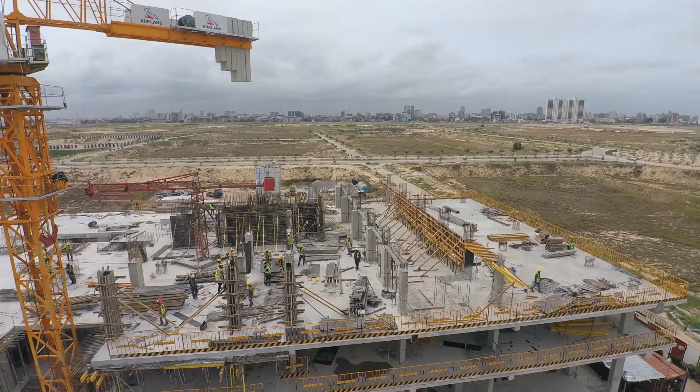Construction produces about a third of global carbon emissions. There's a need to use materials which are eco-friendly, with lower carbon footprint than traditional materials. Fiber reinforced polymer is such an eco-friendly material, requiring less energy to produce than steel and other materials.

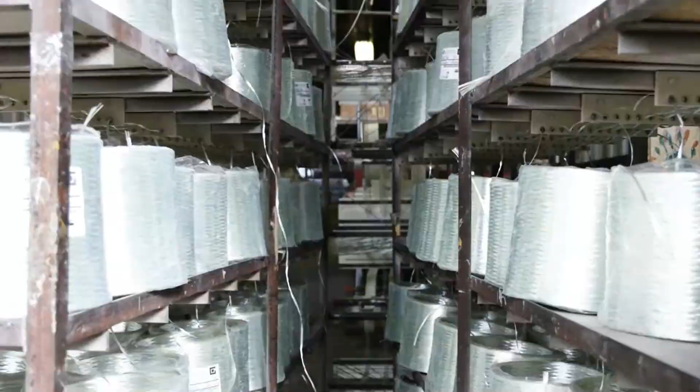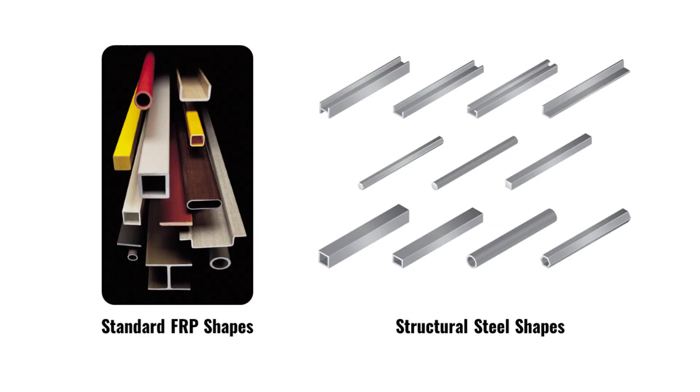What is FRP? FRP is a material where carbon or glass fibers are embedded in a resin matrix. The fibers provide strength in the longitudinal direction, and resin acts as a glue between these fibers. The resulting shapes resemble steel structures, and the benefit is that FRPs are 4 to 5 times lighter than steel components.

The main driver for using FRP materials is corrosion resistance and lightweight. In today's presentation, I will present bolted and hybrid beam to column joints using FRP profiles. This is part of a conference presentation which I presented in Cape Town, South Africa back in 2022, and I absolutely enjoyed my time and want to share my experience with you.

This is how my presentation is organized. Firstly, I will talk about background to the research. Secondly, I will explain the test setup. Thirdly, I will discuss the experimental results. Fourthly, failure modes, which are really very important in this research. And finally, I will sum up some takeaways from this research.

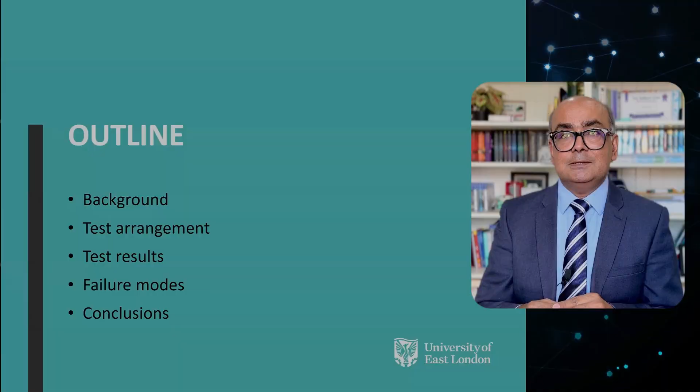FRP composites in civil engineering are mainly used in 3 applications: FRP profiles for new build structures, FRP reinforcing bars, and FRP in repair and rehabilitation of existing structures. The research on FRP rebars and FRP strengthening and rehabilitation is quite well developed. However, there isn't much research on FRP profiles.

The main reason for limited research in this area is lack of understanding about joints, and there are no agreed design codes for FRP profiles. That's why in today's presentation I will focus on cyclic behavior of beam to column joints, where there is very limited research on this topic.

Why is FRP such a desirable material? The main reason lies in its lightweight and corrosion resistance.

Here is a real life application. This is a case study, Dawlish Bridge in Devon, UK. On your left side, you can see the old rusty steel bridge that was reconstructed in 1937. Because the railway is very near to the coastal region, corrosion is a major issue in this bridge.

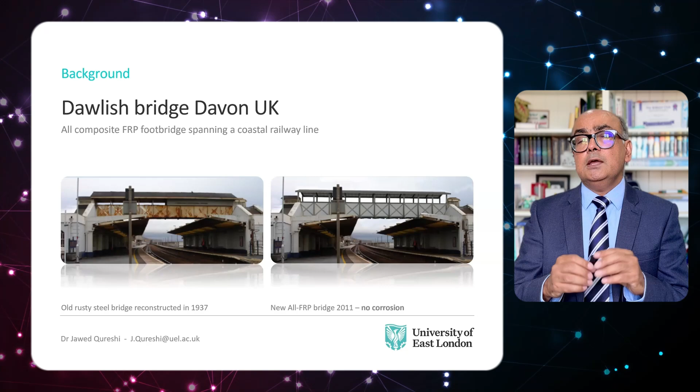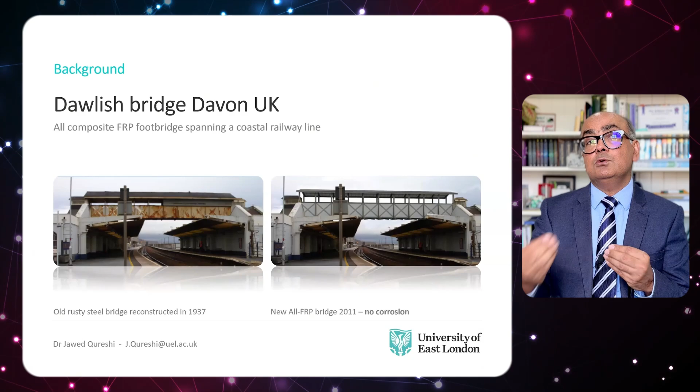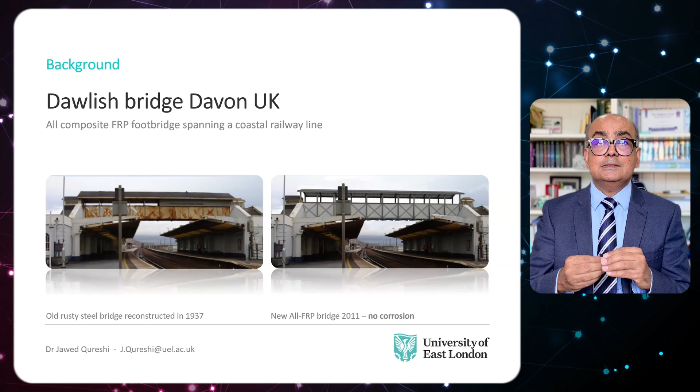On the right side, you can see the FRP bridge, which actually resembles the old rusty steel bridge, but is very light and corrosion resistant. Even this new FRP bridge sustained the 2014 storms in the UK, which were very devastating, and it is still standing as a marvel of FRP structures.

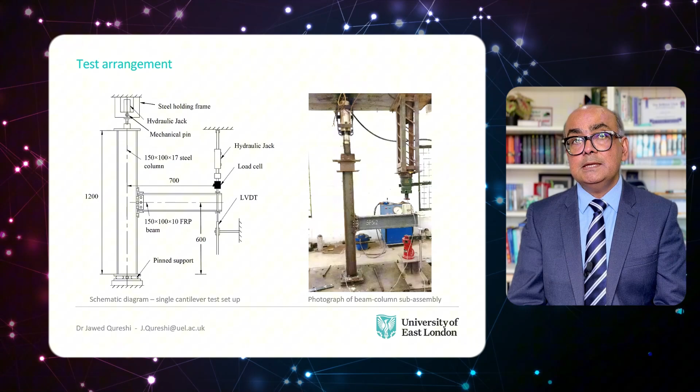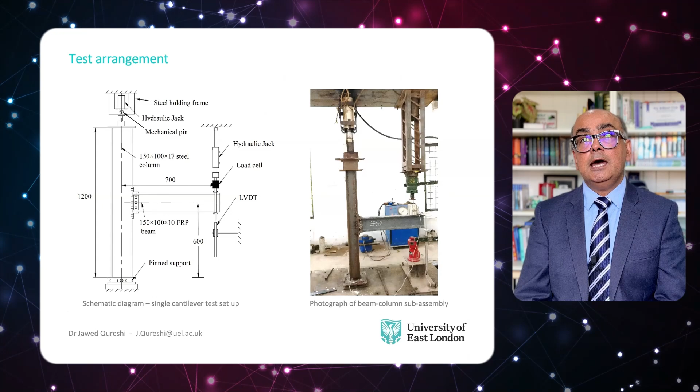The testing uses a single-sided cantilever beam to column arrangement. The column is of steel material and the beam is pultruded FRP. Both FRP lag angles and steel lag angles are used to connect members. Joints are both bolted and hybrid, which is a combination of bolting and adhesive bonding.

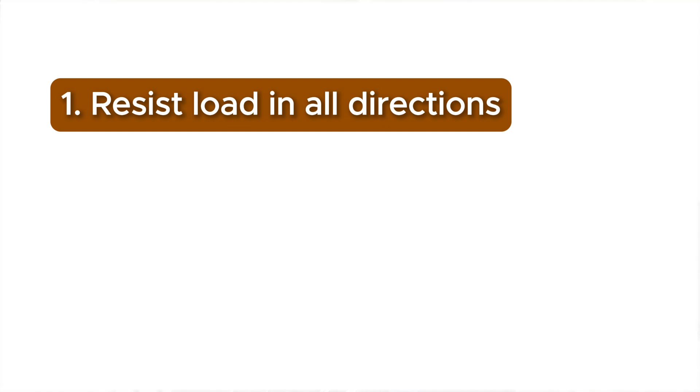You may argue why bolting and adhesive bonding is combined in a hybrid joint when the load is taken by a stiff load path, which is adhesive only. There are 3 main situations when hybrid joints are very useful. Hybrid joints can resist load in all directions. Bonding is good in shear, and bolting is really excellent in tension and transverse loading. So combining them, we can utilize the useful, desirable properties of both materials.

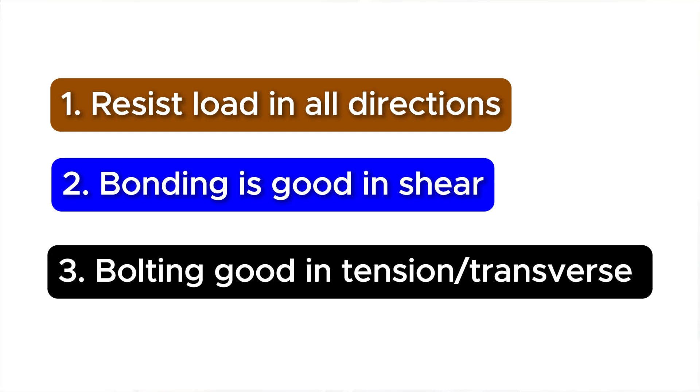Fire and long-term fatigue performance of hybrid joints is better than bolted or simply adhesively jointed joints. However, the extra cost of fabrication must be carefully weighed against the benefits of hybrid joints.

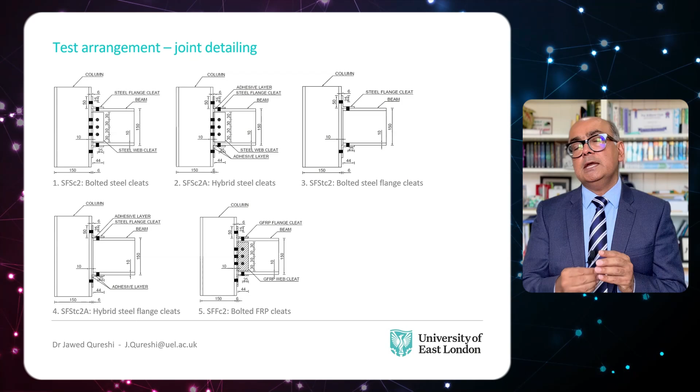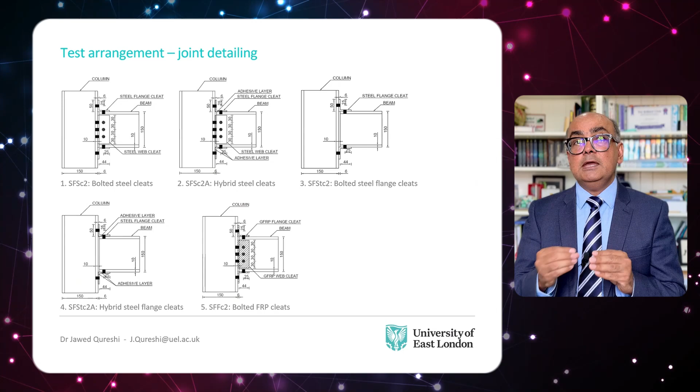This slide shows joint detailing. 5 tests are conducted. The first joint uses bolted steel flange and web cleats, and it has a hybrid version with both bonding and bolting combined. The third and fourth joints are similar to the first and second joint but without web cleats. Finally, the fifth joint uses FRP flange and web cleats.

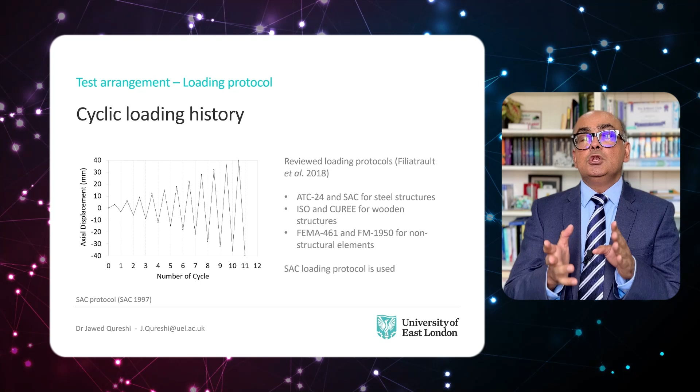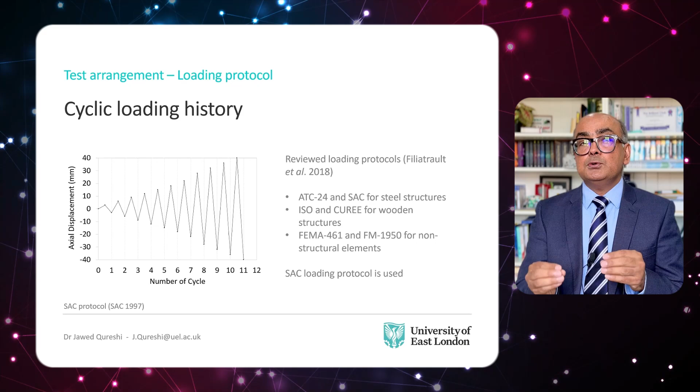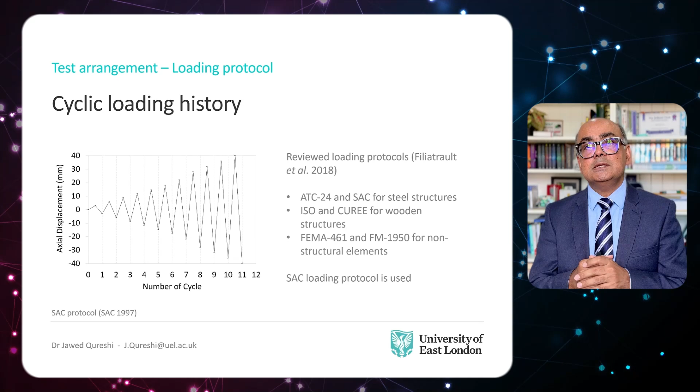Loading protocol - this is very interesting. In the absence of ductility, finding a suitable loading protocol was a bit of a challenge for us. We reviewed loading protocols for steel, timber, and non-structural elements. As most protocols were based on steel yielding, we decided to use the SAC loading protocol, which is based on displacement. Here you can see number of cycles versus axial displacement - that is how we applied loading to the specimen.

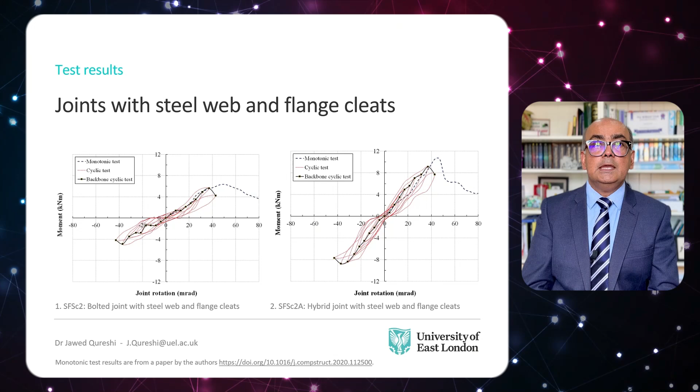Test results: joints with steel web and flange cleats. These are moment rotation hysteresis curves, or loops. The left curve is for the bolted joint and the right curve is for the hybrid joint. Monotonic curves are shown by dashed lines, cyclic curves by dotted lines, and backbone curves by solid lines with markers. It's interesting to note that bolted joints started to show damage at about 2 kN-meter

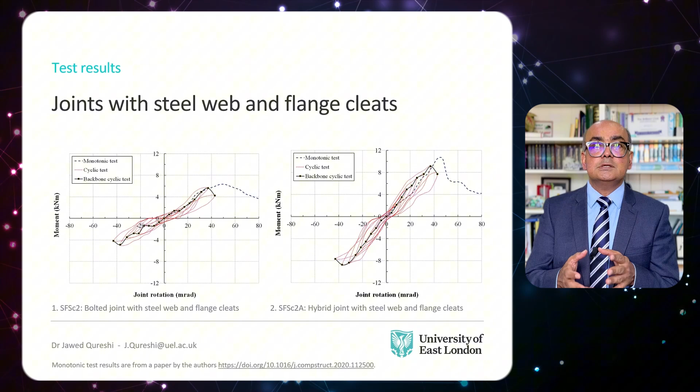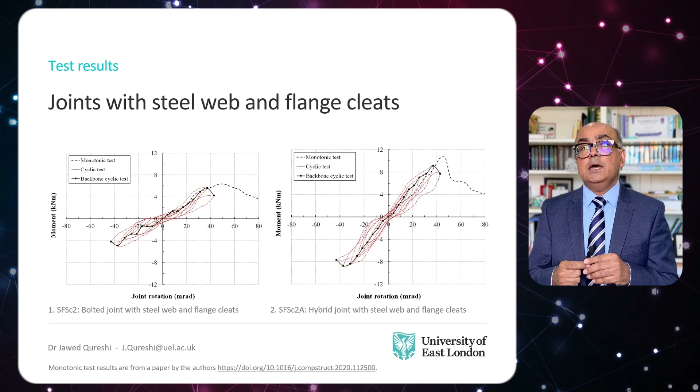and hybrid joints showed damage at 5 kN-meter. Hybrid joints certainly delayed initiation of damage, and showed at least 50% higher moment and stiffness than companion bolted joints.

These are test results for joints with steel flange cleats only. These test results are almost identical to joints with web and flange cleats. The moment capacity and stiffness are almost the same.

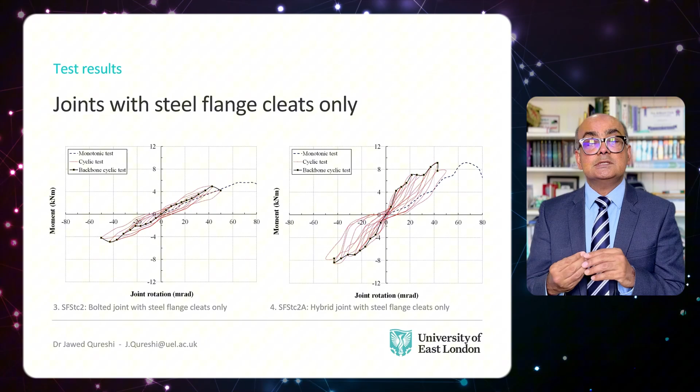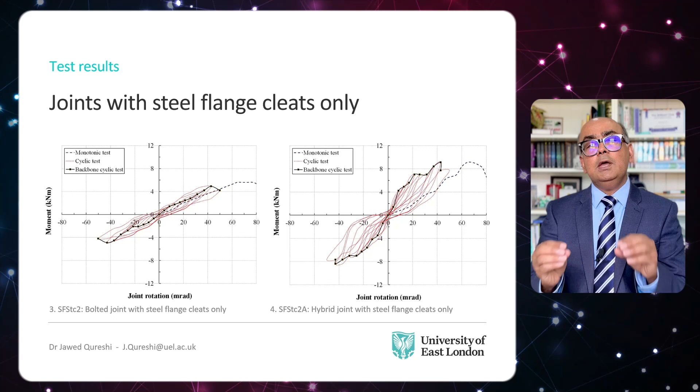Here we are reaching an important conclusion: web or flange cleat on its own is enough to resist applied load, which means we can only use web cleat or only flange cleat—there is no need to combine them both. However, robustness of the structure should be considered when using flange cleats because the joints can rotate in the out-of-plane direction.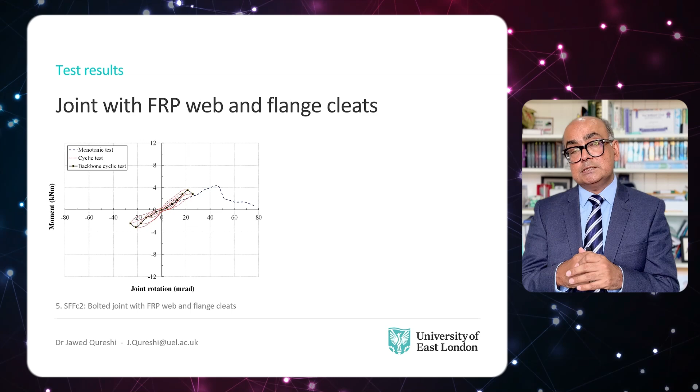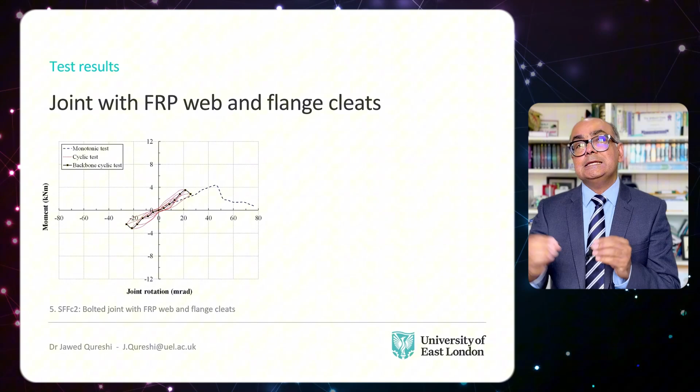These are test results for joints with FRP web and flange cleats. The other four tests I mentioned earlier used steel cleats. It's important to note that both moment and stiffness are far lower compared to steel cleated joints, which is quite obvious because when we use FRP cleats, failure can be due to delamination and cracking, which I'll talk about a little later.

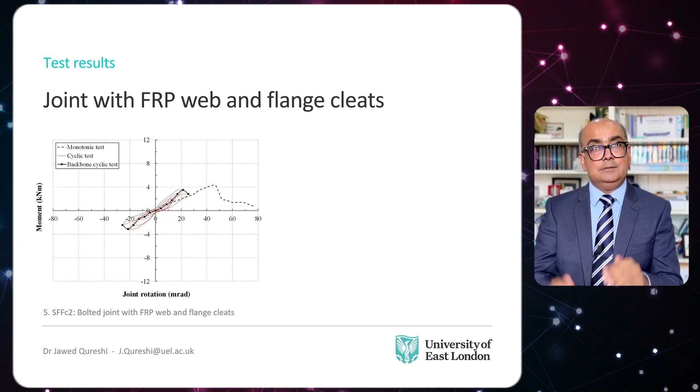What is the cyclic performance of beam to column joints? This is really very crucial because there isn't much research done on earthquake resistance or cyclic performance of beam to column joints, which is a really very important area.

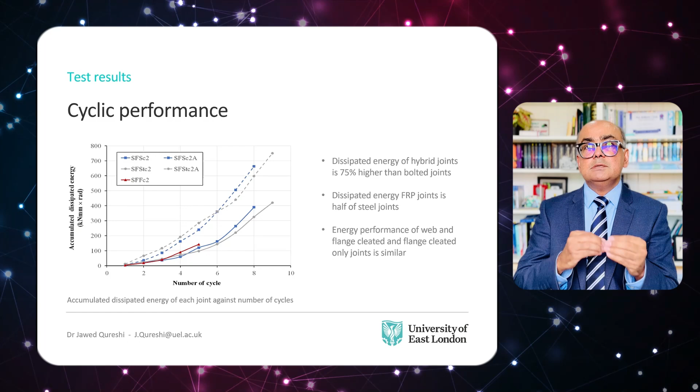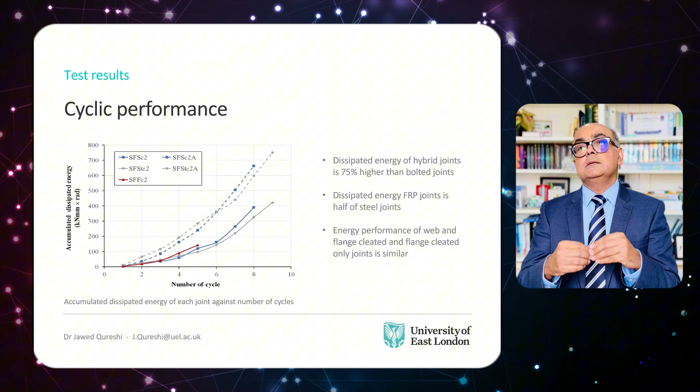In this graph, accumulated dissipated energy is plotted. How do we plot this energy? This has been plotted as area under the moment rotation curve for each joint. Dashed lines show hybrid joints and solid lines show bolted joints. Blue lines are joints with web and flange cleat, and gray lines show only flange cleated joints.

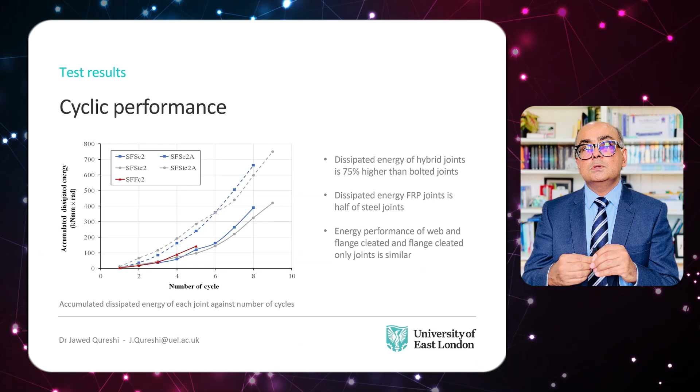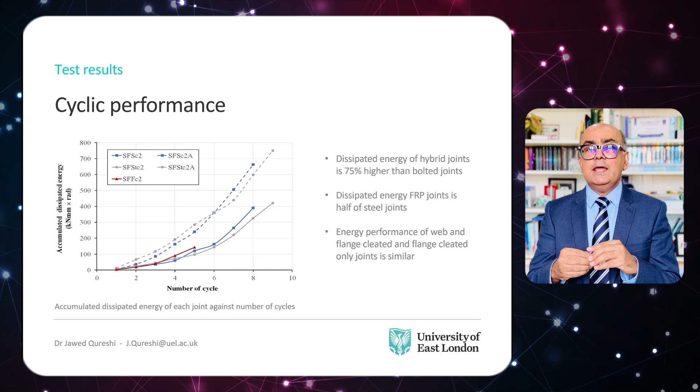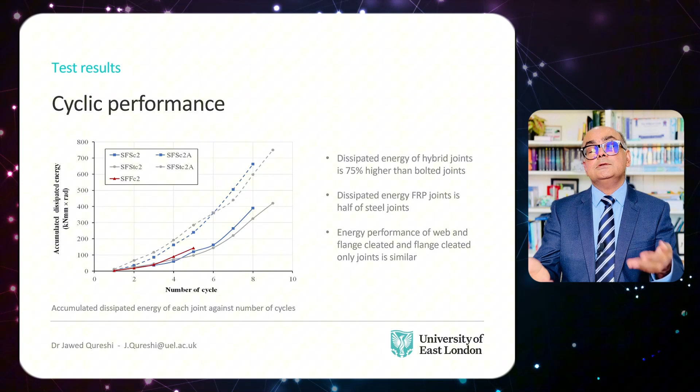Joints with FRP cleat showed the worst overall performance in terms of dissipated energy, and this is pretty obvious from this graph. However, there are no differences in flange and web cleated joints compared to flange only joints, and the reason is that flange or web cleat on its own is sufficient to resist the applied loading.

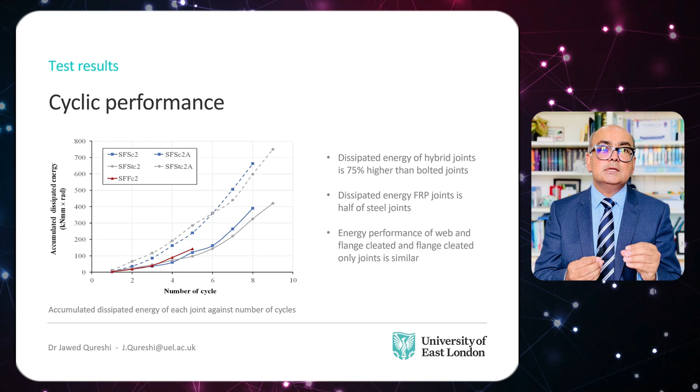Hybrid joints showed as much as 75% more dissipated energy than bolted joints. Dissipated energy of FRP cleated joints is about half that of steel cleated joints.

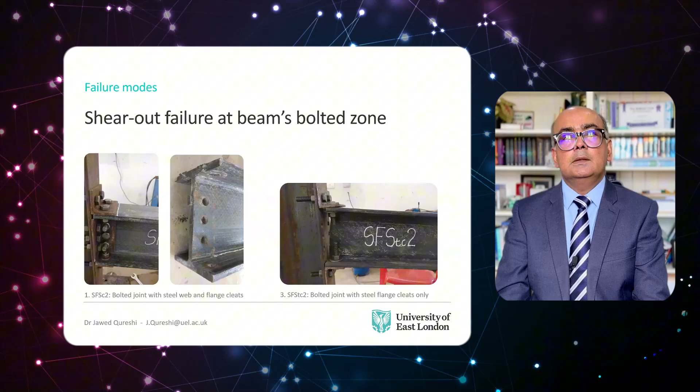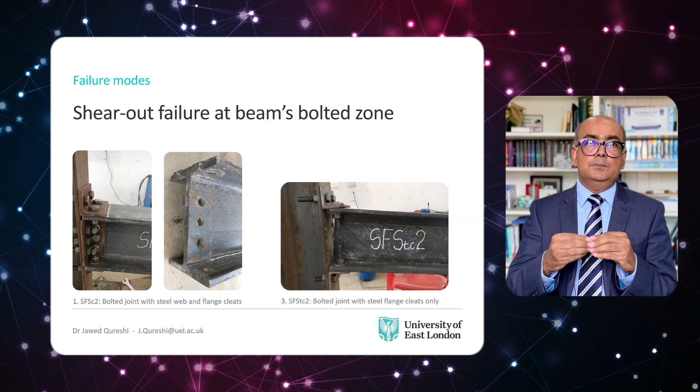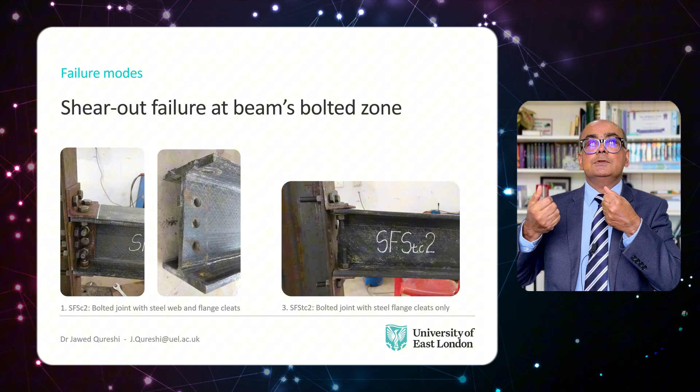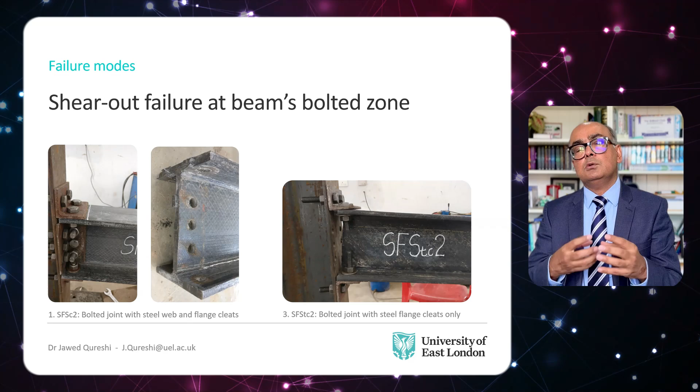There were three main failure modes observed in this research. First is shear-out failure of the beam's bolted zone. The specimens with bolted steel cleats showed this failure where the bolts are trying to shear out of the beam. This type of failure happens in plate-to-plate connections with short end distances or when fibers are oriented in the tension direction of the force.

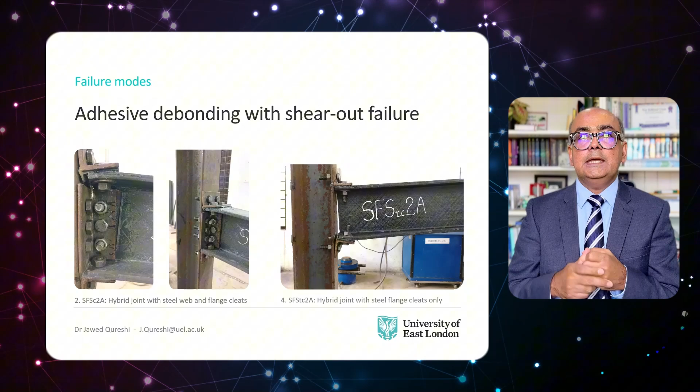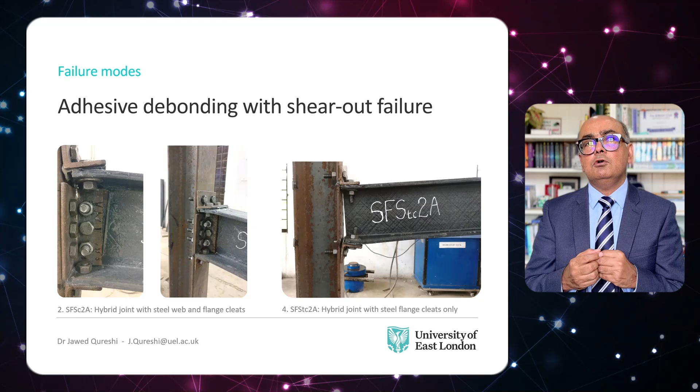The second failure mode observed was adhesive debonding with shear out failure, and this happened in hybrid joints with steel cleats. The failure started with adhesive debonding followed by shear out failure of the beam's bolted region. Some cracking at the web flange junction of the beam was also observed in this failure mode.

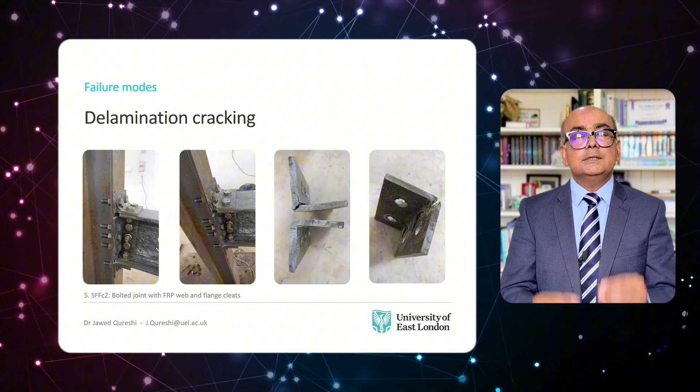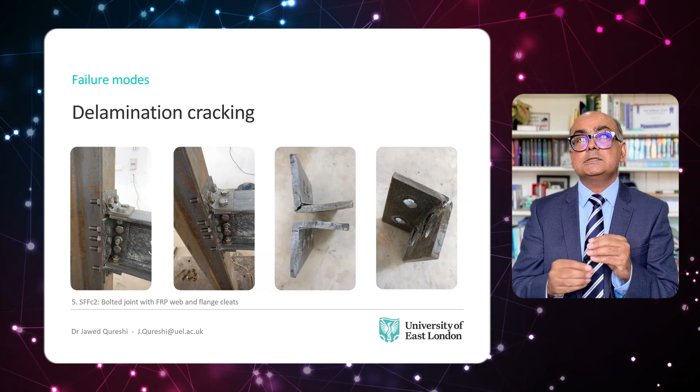The third and final failure mode is delamination cracking, and this happened when we used FRP cleats. The failure mainly happened due to delamination cracks at the root radius of FRP cleats. However, no cracks were observed on the beam side.

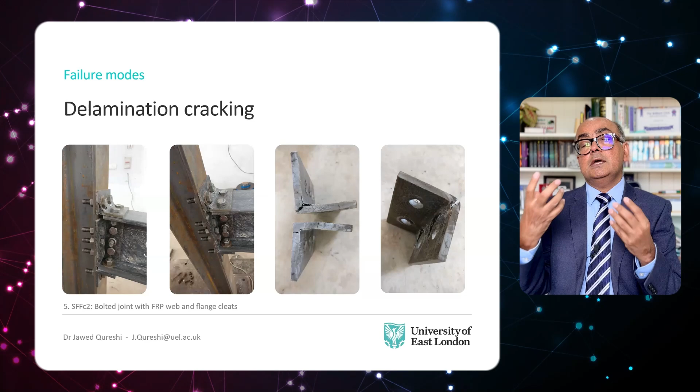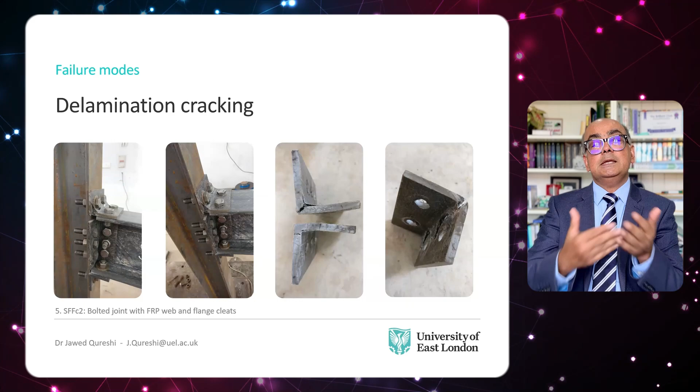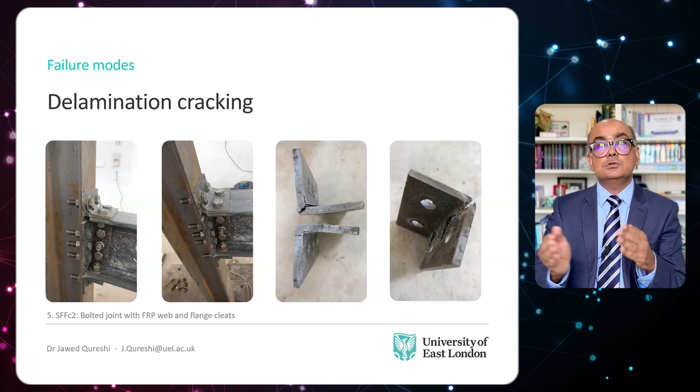This is quite obvious when we use softer materials like FRP as cleats. When you apply a moment, the first thing that will fail is the weaker material or weaker component, and that is the FRP cleats. That is the reason we observed a lot of cracks, as you can see in this picture, and the specimen failed due to delamination cracking of cleats.

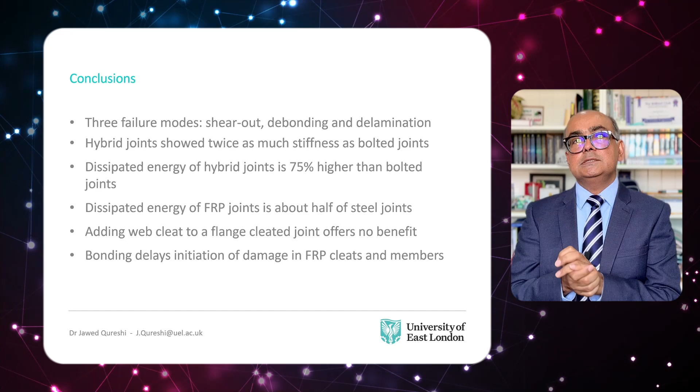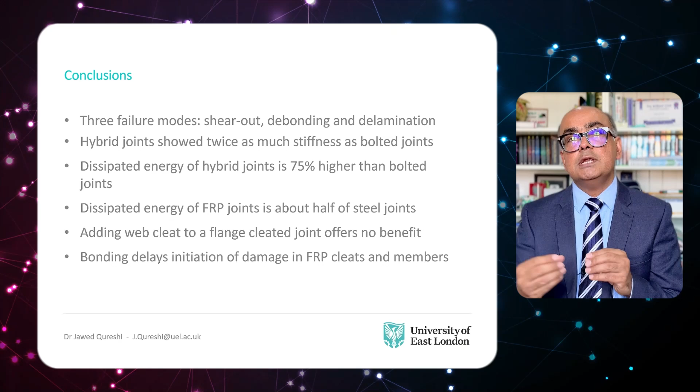Now I'm in a position to conclude the work. There were three main failure modes observed in this research: shear out failure of the beam's bolted zone, adhesive debonding with shear out failure, and delamination cracking at the root radius of FRP cleats.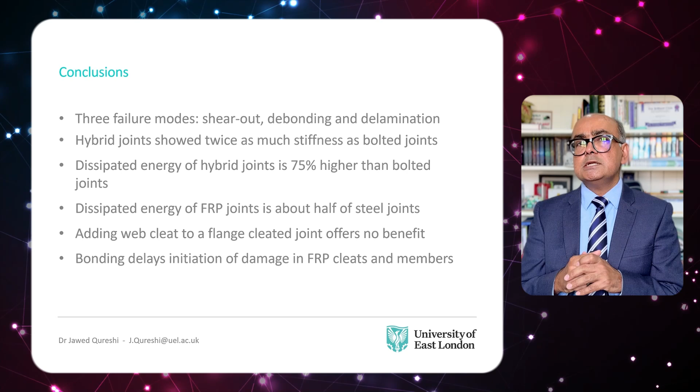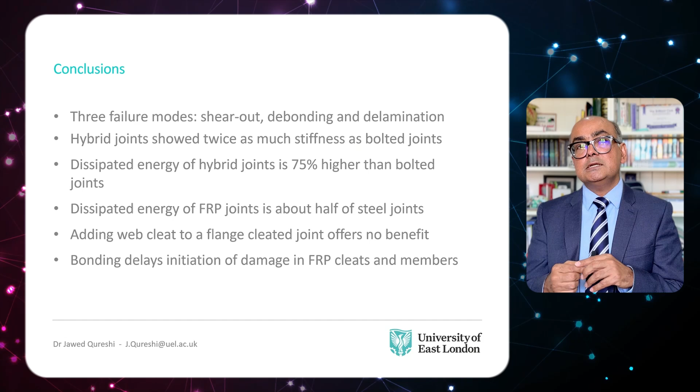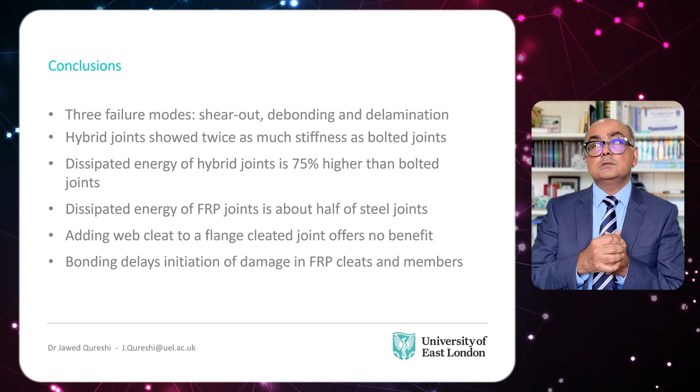Hybrid joints were much stiffer than bolted only joints. Accumulated dissipated energy of hybrid joints is about 75% higher than companion bolted joints. Energy of FRP cleated joints is about half the steel cleated joints. Web and flange cleated joints compared with flange only cleated joints showed no difference in results. Adhesive bonding delayed the initiation of cracking.

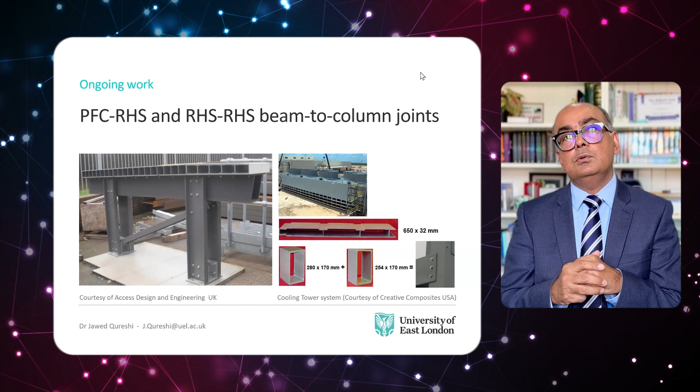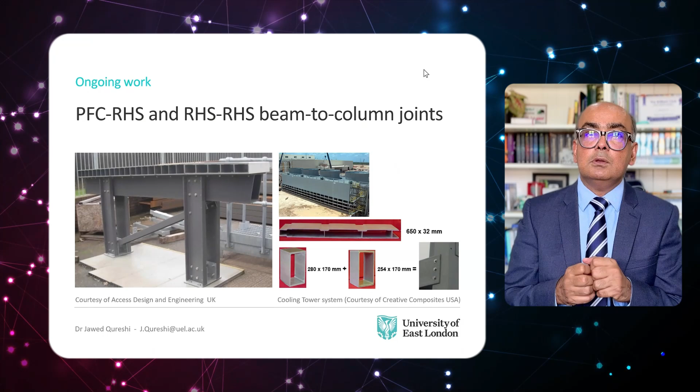Currently, our research group is working on PFC RHS and RHS RHS beam to column joints. PFC is parallel flange channel, RHS is rectangular hollow sections. These are practical joints which have been used in industry for quite some time, but there is no research available on these joints to back up their behavior.

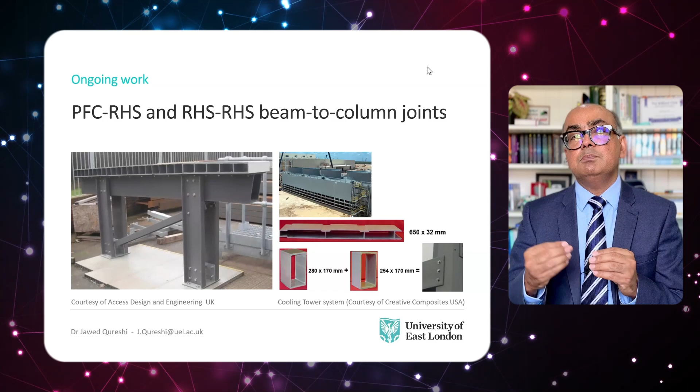The first joint, which is PFC to RHS joint, has been used in railway platforms quite a lot. The second is RHS to RHS joint, which has been used by Creative Composites USA in their cooling tower system.

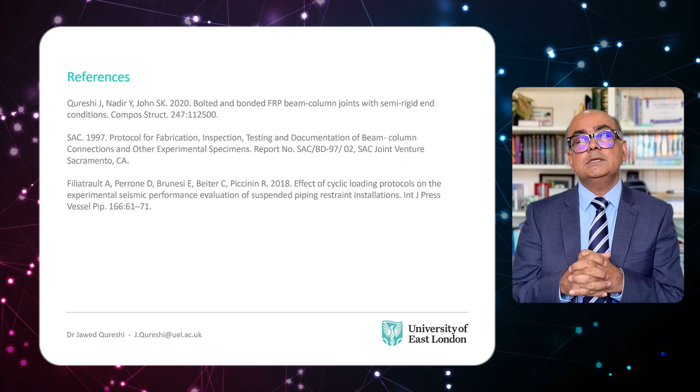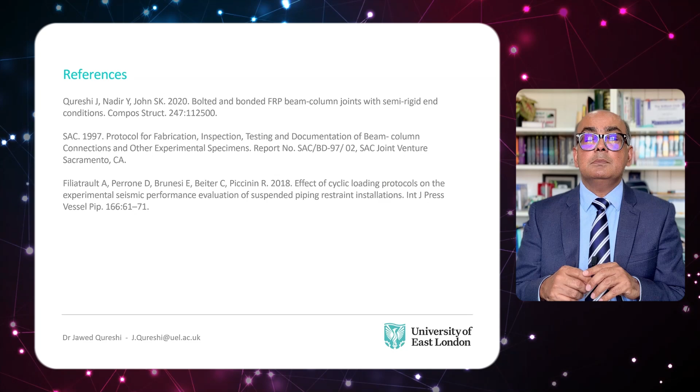These are a few references which I used for preparation of this presentation. The first journal paper is our paper in Composite Structures, which is on monotonic testing of the same joints, and I presented some of that work initially here as well.